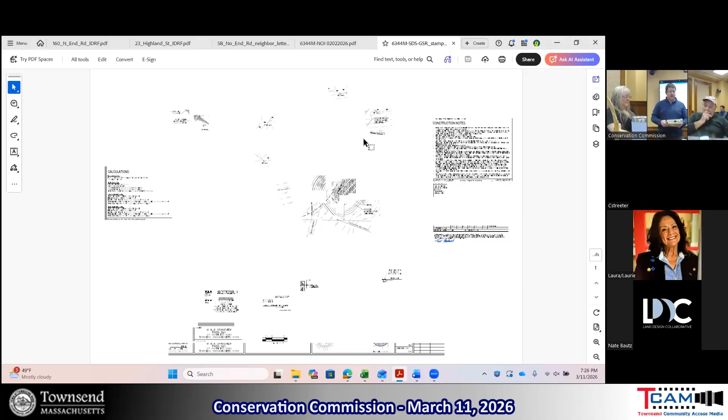In this, the house, the proposed well, and the proposed septic tank, and then associated site grading are all within the 50 to 100 foot buffer. The septic system itself is outside of jurisdictional areas for the commission. That's located completely outside of the 100 foot buffer. Mass DEP had no comments on the project. The project is not subject to a Townsend stormwater permit. We're disturbing less than an acre for a single family house.

And then we're not subject to Mass DEP stormwater standards as a single family house. I do know the project has been before the Board of Health, and I believe we have that permit in hand. Stepping back big picture on the way that this was laid out, we meet all required setbacks from any abutting wells, any proposed wells for the septic system. It meets all required setbacks for property lines. So by default, by meeting those setbacks, we've met the state requirements for impacts to abutting lots with the septic system.

The proposed house itself is located kind of on the northeasterly of the septic system, closer to the wetlands, yes, but most of the grading around the house will be directing runoff back that way. Behind the house? Back to behind the house, yes. So you can see, please. No, I'll share. So there is kind of a topographical ridge running parallel to North End Road, all along the frontage. Oh no, wait, I'm looking at it backwards. That is a bit of a swale, yes. But by the siting of the septic system and the way that's pitched, that will be pitching water more northerly away from North End Road.

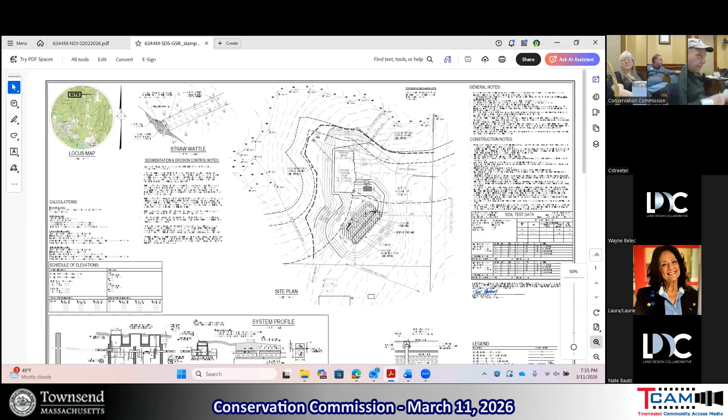Well, it's really for the Board of Health. That's why I just looked at you and said, go with it. Your role is to assess whether or not any Wetland Protection Act regulations are not being followed. The Board of Health has the responsibility to determine if it's gonna affect the neighbor's well water or water source.

What about the intermittent stream? The intermittent stream, we're away from that. Yeah, so I checked it on StreamStats, which is available to anyone who wants to look it up. But it doesn't meet the requirements to consider it a perennial stream because it has less than a square mile of area of watershed.

So that's one. If it has a square mile of watershed area, it has to be considered a perennial stream, even if it dries up. If it doesn't, there's another threshold. It can be half a square mile of watershed with a 0.01. I always get this messed up. But as Jimmy just said, we're beyond that, so we understand where we stand. And it doesn't have a half mile either of watershed. I just wanted to double check.

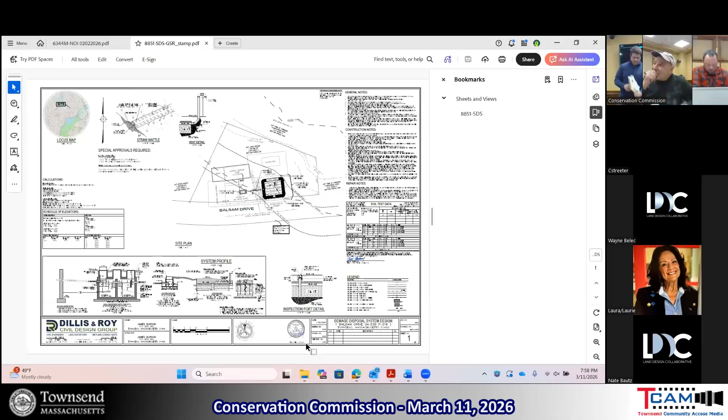1 Balsam Drive, map parcel ID 53B-216-0, NOI, DEP file number 308-0728, TWB 2026-003, approximately 7:45, it's now 7:58. Applicant, James Burson, proposes a project for a septic system replacement. Part of the construction will take place within a riverfront area and 100 feet of a bordering vegetated wetland.

I make a motion to open the hearing at 7:58. Is there a second? I'll second. Mike Watson, yes? James Doreen, yes? James Gates, yes. Pat Noel, yes. Sandra Wood, yes. All right, thank you very much. Oh, you gotta read the legal. Yeah, and then we just gotta make sure our abutters.

Pursuant to the Mass WPA and Townsend Wetlands bylaw, Townsend ConCom will hold a public hearing Wednesday, March 11th, 2026 at approximately 7:45 PM. The hearing will be held via Zoom and in person at town hall on a notice of intent filed with ConCom by James Burson as TWB 2026-003. The property is located at 1 Balsam Drive, map parcel ID 53B-216-0. The proposed project is for the construction of a replacement septic system. Part of the construction will take place within a riverfront area and 100 feet of a bordering vegetated wetland.

Parties wishing to speak in support of or in opposition to this application may do so at the meeting or in writing prior to the meeting. Copies of the application are available for review at town hall during business hours. Colby, do you know if the sheet was, certificate of... Yeah. This is the one that Jack emailed you, Colby. Certificate of. Okay. But yes, I will print it. As soon as you don't need the second.

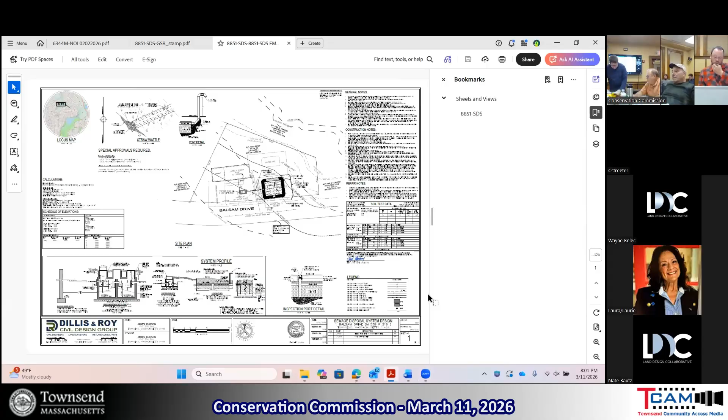But I do see the plan says a 2-compartment, 2,500 gallon tank. Yeah, the only revision on this is stone depth. The original application had said 1,500. Right, but on the site walk, we discussed it was gonna be a split tank, 2,500. Understood. I just wanted to correct it. You said 1,500, we're looking at a split 25. Split 25, correct. And the plans are consistent with that, and the commission does have those same plans. Good. Sorry for the interruption.

Nope, I appreciate it. Yeah, on-site jurisdictional areas include the 35-foot no disturb, 50-foot and 100-foot wetland buffers, and 100-foot and 200-foot riparian zones associated with tributary A of the Witch Brook, which flows, I believe, easterly, which is this direction. To our back, to the right of the property, looking at it from Balsam.

The entirety of the replacement leaching facility, including pipes and the overdig, is located outside of the 50-foot wetland buffer, and is therefore presumed to protect the interests of the Wetland Protection Act, MGL 131 Section 40, which covers the removal, fill, dredging, or altering of land bordering waters. So because this septic system is 50 feet outside of the buffers...

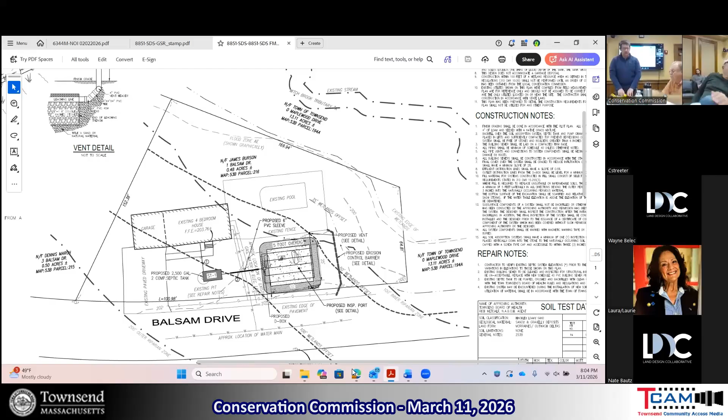Mass DEP did have a comment regarding the Zone AE flood zone. We had shown it graphically, pulled off of the FEMA maps. They stated it should be shown based on elevation. Our project had been plotted on an assumed datum, of 200 feet at the top of the property. It wasn't mapped to any state plane datum.

This was part of the revisions they just did, so they really haven't all gotten to us yet. They're still trickling in. It was a guess, based on their computer modeling. However, they do old modeling, and their mapping does provide an elevation.

When you adjust our assumed datum to the state elevation datum, it's either 88 or 83, I always get them confused. The flood elevation is at 268.4, and our septic repair is at 275, so we're basically 7 feet above floodplain elevation, well outside of it. This blue line here is approximately 268.4.

Is there something wrong with the contours? Because your elevations on the plans aren't 260 anything. No, they're not, they're an assumed datum. So, Colby, if you could turn on the contours. I'm trying. Thank you.

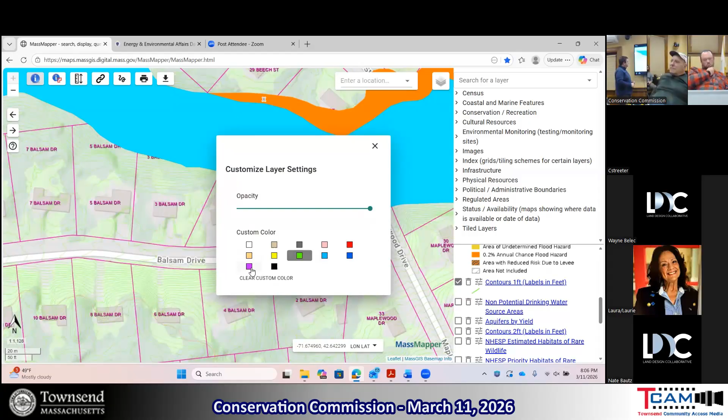Closer and closer. Might be a little better, at least it's visible. So what these show is there's a significant slope, a significant drop down to the floodplain, and we are 7 or 8 feet above it. You could see it from the site walk, and it's very well illustrated there. This area here is where what's called the existing pool is called out on the property.

So I know that comment came up from Mass DEP. It's essentially a non-issue, especially for a septic replacement. We're easily able to demonstrate that we're well outside of the floodplain.

Oh, he's gonna put, so he proposed a wattle at the base of the fence? So we're proposing a wattle here. Right, we don't have it at the fence though. No, we don't have it at the fence.

This septic is not going to be a mound. Groundwater is between 90 inches and 120 inches, and it looks like a fairly granular material. Yeah, it's all sand in there, so they're gonna be able to just put the system in at existing grade. There's gonna be no need to put in a mound that would require extensive erosion controls around it.

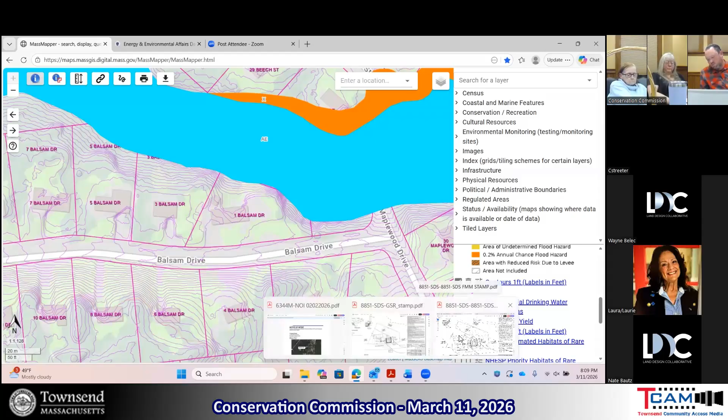And then the legend should be updated to match. So the legend match is the plan. This is an exhibit plan that was with these colors. So this goes no further than this meeting. The actual construction plans, the legend matches those. Okay.

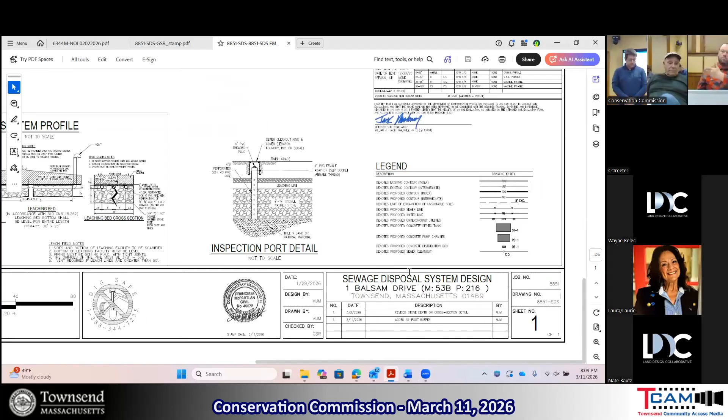So is this the same plan we were looking at the site? Alright, Mike, anything? Well, yeah, Jimmy's right. The snow was clearly melted right there, so something is going on.

But the question I have, going back to the construction materials - if you build a leach field first, can you then put the construction materials where the proposed tank will be and deal with that later? I think the construction materials are gonna be straightforward, pulled right out of there and the new materials brought right in. Everything's gonna be within the disturbed area, from the driveway all the way over to where the leach bed is, Mike.

So that whole area will be disturbed, and that'll probably be their area where they do the removal. The 1,500 gallon tank is gonna leave, correct? The existing tank is gonna leave and they're gonna put in a new tank. It'll be crushed, hauled off. They're gonna put the new one there because it's in the way.

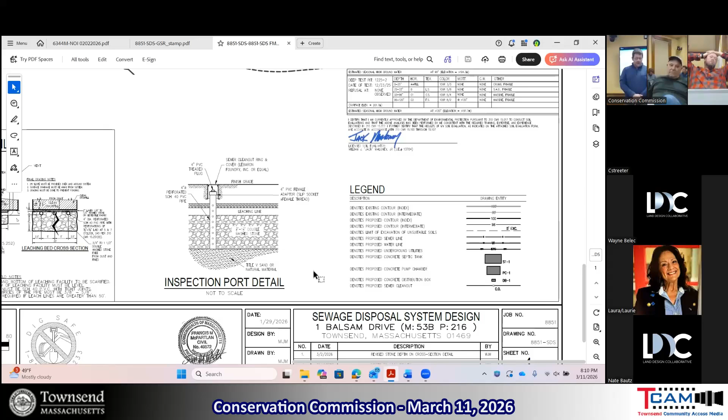And this being a septic repair as opposed to new construction, there's not going to be a massive loam pile where they clear and regrade the entire lot. This is very minimal. Thoughts? No, I think I'm all set on that. Sandra? It seems to be pretty straightforward.

I remember there was another case where we thought it went before the Board of Health and we thought it was approved. I was talking to Colby about that earlier, and I'm glad to hear that the Board of Health did. Well, did they? You wouldn't tell me, they don't normally inform us. But they have not had the meeting yet, as far as I know. I'm unsure about this one, whether this one has any kind of approval or not, because there was something else that went on recently that we voted on.

That was the thing I wanted to ask you about. We voted on it and then come to find out the Board of Health hadn't actually - didn't we have to unwind it? But anyways, I would hate to think it'd be a similar situation because I don't wanna vote on something the Board of Health actually hasn't okayed. I mean, isn't that how it usually works? Correct me if I'm wrong. We've not had to do that in the past. Correct. So now you bring up a valid thing - 10 West Elm was, in all my years here, the first time I've seen that. So, I'm gonna make a motion to continue this to our March 25th meeting.

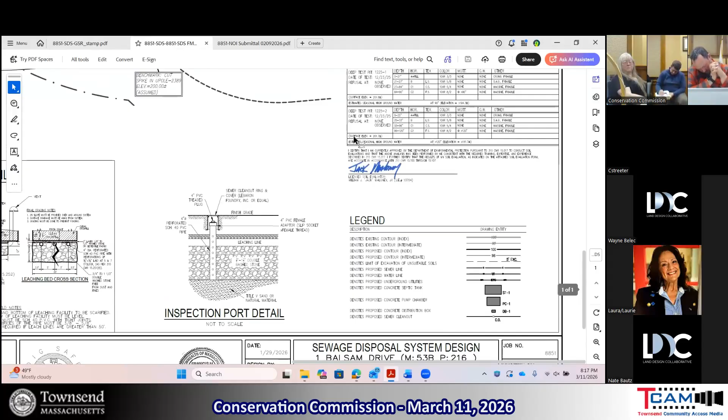We have to close out the hearing. So I make a motion to close out the hearing for One Balsam Drive, DEP file 308-0728, TWB 2026-003. Is there a second?

Go for it, Pat. I'll second it. Mike Potts, yes. James Drowan, yes. James Gates, yes. Sandra Lord, yes. Pat Jamal, yes.

Colby, I want to jump down to item 3.2 - Meeting House Park cutting plan, completion and status discussed. Is it short and sweet? Yes.

So the old Meeting House Park, where we were having a timber cut - Craig Birch and his company finished as of last week. They provided us with all the tally, the trip tickets which present what they brought to the pulp mill and saw logs. There was a lot more rot and funky wood in there than we thought, so the numbers are vastly different than what we thought were going to come out of there. It is what it is. We came out ahead, but at the same time, we all knew we couldn't tell how extensive the stain was into the trees.

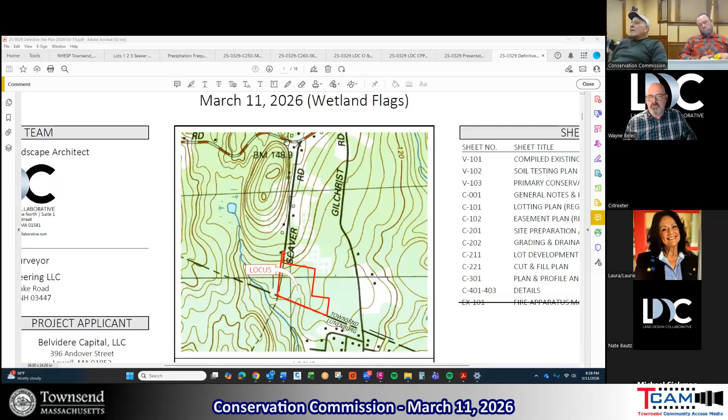For the benefit of the commission, when I met with you folks yesterday, Mr. Chairman, I remember a comment between you and Mike about having some color on the exhibits and the presentation. So I took the liberty of adding a little bit of color to this so that you folks can see in better detail what is going on out here.

So the property, like I said, consists of 13.04 acres. We do have some wetlands on the property. As you can see, it's this area in here in green, and that measures about 51,000 square feet, just north of an acre. So the property, the way it's laid out, Seaver Road is public to this point here. This portion in here is private, and it's actually an easement. This is all the parcel from here, wraps around like this, out around in red, along the town line, back up and over to this narrow section in here.

There is an abutter as you enter the property here, located to the left as you're driving in, and it's located on this site here. So the road is a gravel, partially paved road, in somewhat poor condition. As you get through this area, it's primarily gravel.

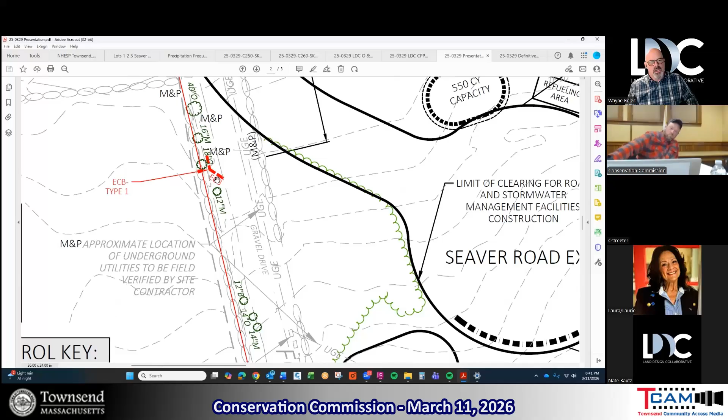Up in here, what we're proposing is another type of erosion sediment control barrier, and that is the silt fence backed by the straw wattle. The reason we're doing that, it's a limit of work, nothing more. There's no grading that's going to flow toward this area, but it serves as a limit of work and ensures that nothing creeps into the jurisdiction of Natural Heritage.

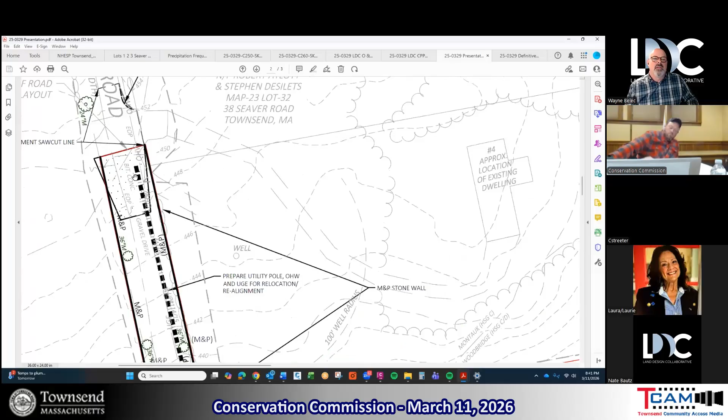Looking at the road from the end of the cul-de-sac, it comes in 500 feet. It's a 40-foot or variable width layout for a couple reasons because of the subdivision rules and regs. It's not a straight 40-foot layout. Not to mention that out here, the width of the road is only about 37 feet. And now I'm referring to the public road layout, the end of the public layout.

So what we're proposing in here is we're looking to maintain and protect the trees along the side of the road, and we call that M&P. Or remove and relocate; if you ever see the terminology R&R on here, it's remove and relocate. As I was saying to the group in the field yesterday, as we look at site prep plans.

Now I could have looked to make this look better with you folks, with DEP, and I could have been disingenuous and said, rather than have the limit of clearing out to where it needs to be, I could have shown it in here, nice and tight to the roadway and wrapping around, continuing nice and tight.

The fact of the matter is in order for us to construct the roadway, we're going to need to remove the material that's in here. So the road will come down through here. It will require the removal of maybe 2 to 3 feet of topsoil and subsoil. It's going to be stockpiled somewhere.

So what we've done is we've run some calculations and determined the piles of these stockpiles. So we have loam stockpile areas and storage stockpile areas. So we've got a combination of things. We've got several hundred yards of material that's going to be stored. We also have a materials processing area.

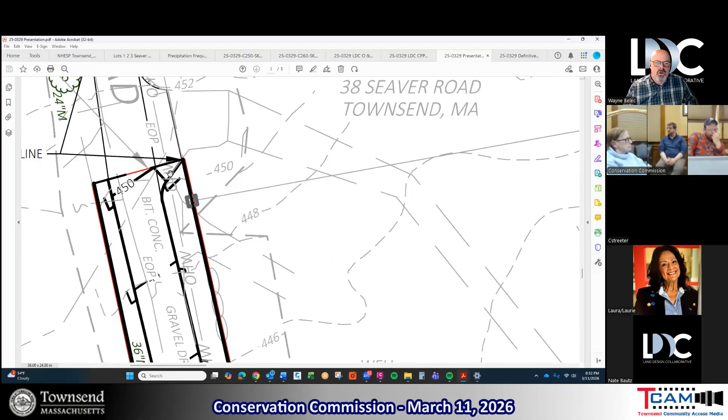So what we are proposing here is a curb system. The curb system is going to be on the sides of an 18-foot wide paved roadway. We'll have 2-foot shoulders beyond that. That work is going to begin up at Mr. Mulligan's, just beyond his driveway, at the edge of his driveway, not on his property, but we're going to install a bituminous concrete berm. Yesterday, when I met with the commission, I thought we were going to have some open drainage. Looking at it again, because of the grades, it's all bituminous concrete berm where we can capture the runoff.

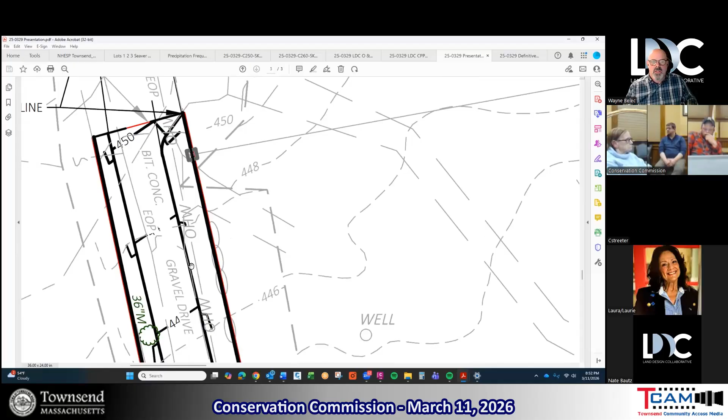Anything that comes down here, as I said, we mimic the topography here. The existing contours pitch in this direction, so we've mimicked that with our proposed contours where everything is going to flow to this side of the road, come down to this area through a sediment forebay in here, and through a very flat grass swale that comes down through here, eventually hits a plunge pool, and the plunge pool has a level spreader on it.

So basically what that does is once the water comes down and it comes through, at this point it's going to be more or less a shallow concentrated flow as it comes into this area in here. Because it's so flat out here, we are probably looking at a shallow concentrated flow. If the topography was steeper in here, it would channelize and the velocities would be significant when it hits the riprap basin. In this case here, it comes down into the basin, hits the level spreader, and then begins again.

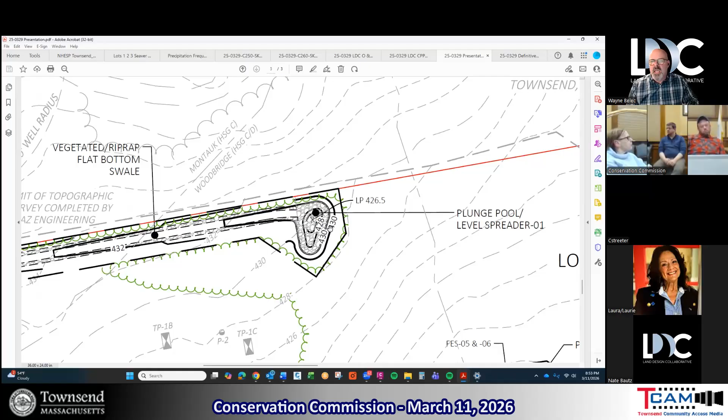Typically when you're looking at overland flow, it begins with a sheet flow, typically 50 feet, goes to a shallow concentrated flow, and then to a channelized flow. Basically what happens here is once it comes through here in a shallow concentrated flow, hits this here, and overtops the top of this berm, it's basically dissipated all the energy, and then it continues the process again.

Now this comes out as sheet flow, again for 50 feet, so that by the time it gets down to this area here, as you can see the contours doing this, topography is going to allow it to come down into a depression where it's going to flow through a pair of 24-inch pipes discharging into yet another energy dissipating plunge pool. Again, same principle, cascading over the top, riprap, and then down below. You will see that, yeah.

You're doing a great job, and this is a very comprehensive plan. I want to focus on areas that are within your jurisdiction. Yeah. So, be polite. Yeah, no, that's fine, Mr. Chairman. I get it. Really comprehensive plan, and I nerdily like looking at it. Well, I appreciate that, and I take that as a compliment. Let's go to your jurisdiction.

So within your jurisdiction, what you see here is the hidden lines, the dash line in here. Those are your erosion sediment control measures, the measures that are necessary to be down gradient of the stockpile areas and for the activity that's being proposed on the site. You're going to have a closed drainage system that's going to flow through some deep sump hooded catch basins to a manhole discharge into a sediment forebay, which is going to overtop and then go into a basin that's going to have two sections in it, linked by an equalizer pipe.

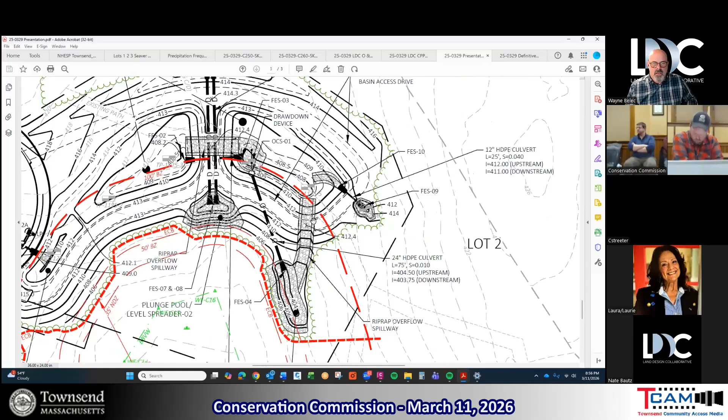We are proposing this at this time, again, just beyond your jurisdiction, but we would rather plumb the basin for everything coming down the road associated with the driveway that's going to be serving this lot up in here. To give you guys an idea.

That nice flat discharge at the bottom of all these basins, looking at how that relief is. Yep. So it mimics what you've done to the top. Down through that middle strip, you'll get a high velocity. Once again, you'll dump into the riprap. Nice level flow, slow it down, discharge down to the next one, okay. Yep, nice. So yeah, that explains it in a nutshell. What we're looking to do is just dissipate all the energy before it gets to the resource areas. The last thing we want to see out here are any erosion issues down the road.

So after everything's graded out, everything will be stabilized, loamed, seeded. When we go to do an as-built of the site, we'll do an interim as-built of the basin to make sure it's properly constructed, so that they're not going out there after they've loamed and seeded and disturbing anything. We like to get that before they loam and seed, tell them it's okay to go ahead and loam and seed, and then we're done. And then after the two growing seasons or within that, we'll be coming requesting a certificate of compliance for the order of conditions.

This will all be subject to the National Pollutant Discharge Elimination System program, the NPDES program, because we're altering more than an acre of land. So we're going to need to file an eNOI with the federal EPA for the disturbance of more than one acre of land, and that's going to trigger a stormwater pollution prevention plan.

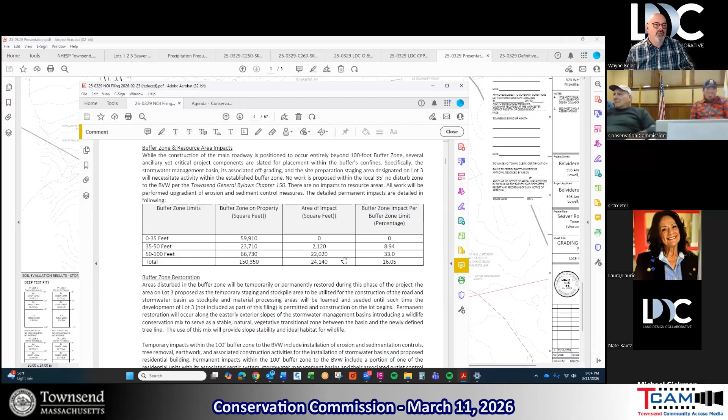The wetland system on site is about 51,000 square feet. So when you look at all the area within your jurisdiction, the wetland and the buffer zone, you're talking about 200,000 square feet, roughly 5 acres. Of that 5 acres, we're altering a total of a half acre, and that's all beyond, mostly beyond 50 feet of the buffer zone, in that second section of the buffer zone up in here.

Any questions, Mr. Chairman?

We can go around the table, and I want to remind everyone this is not for the house lots. This is just for the road. It's for the road and the stormwater associated with the road -- stormwater management, water control, etc.

They designed it so that they wouldn't have to redo stuff when the time comes to do house lots, or if they did, it would be taken care of now. But you said 2 out of the 3 lots you foresee filing. Yeah, I think so, Mr. Chairman. So lot 1 is not going to be within your jurisdiction. This guy here will be -- the septic system and the grading will be within your jurisdiction.

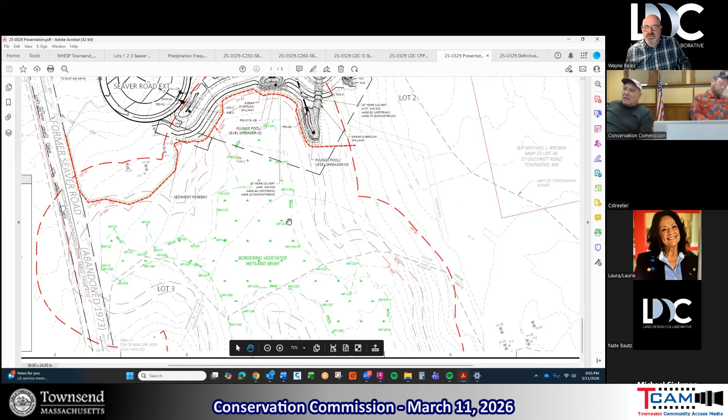This guy up in here, I don't think so. I think his driveway comes up through here, so I don't foresee any of his work being within jurisdiction. So you're probably looking at just this lot, and that was on that long dog leg that went down. That's correct. Okay.

But regardless, yes, this is just -- Colby, I can see that. Hi, Wayne. Hi, Colby. I got a question. I'm gonna come close to the microphone so I don't have to yell.

Do you intend on completing this order of conditions process before you sell the other parcels, so that the certificate of compliance doesn't become the responsibility of the new homeowners? He did say that, yeah. No, he did say that. Obviously they aren't going to apply for the completed order of conditions for 2 growing seasons, but it is gonna take time to sell and build. So through the chair, it's rare that we would request the order prior to the 2 growing seasons.

The only exception is if you go ahead, loam and seed, and as part of that loam and seed you get some decent rains and things really take off, and you exceed that 75% coverage, then you're able to go for it. I've had situations, for instance in Hudson, within 6 months everything was lush, well beyond the 75%. So typically it's 2 growing seasons, but on occasion you do get them to go quicker. But yeah, we're anticipating 2 growing seasons.

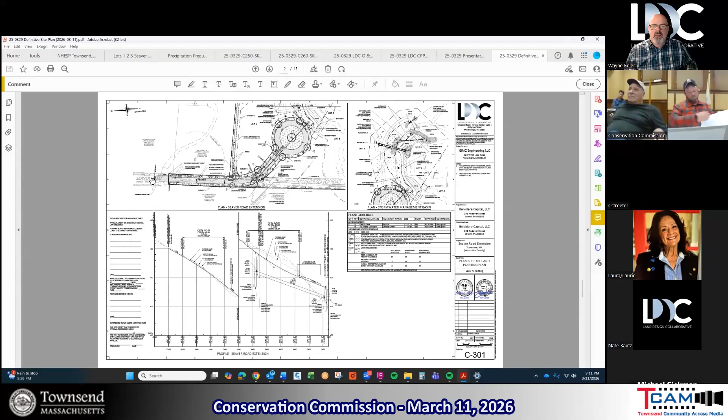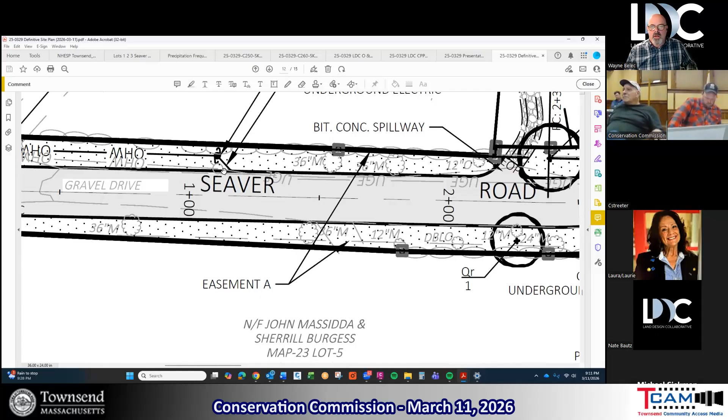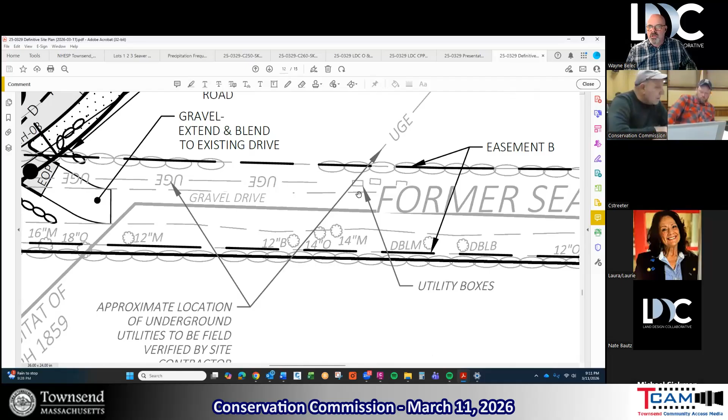I'm going to go to the plan and profile sheet to show you how the utilities are coming into the site. So here we've got a utility pole—there's an overhead wire that comes down to a utility pole located right here. Because that's within the curb, we're going to relocate the utility pole, rerun the overhead wire, and then go underground to connect to the underground service that currently exists and serves the property here and here. There are utility boxes here serving it, and it shows an underground electric that comes into the site.

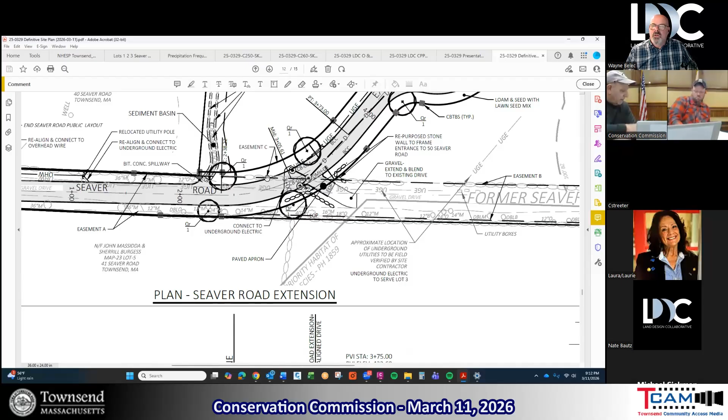So we're thinking once we get out there, we'll do a little exploration to confirm that this does in fact serve Lot 3. The rest of it goes on to 50 Seaver Road. What we're looking to do is pick up from this underground electric right off the edge of pavement, and run it down to a transformer pad here, which will serve the 2 lots out back, going up a driveway. So there'll be a driveway out to Lot 2, the one that dog-legs, and it'll have its own service there—this guy can pull off of this one right up into his lot.

We are proposing— go ahead, Colby. We did have a couple comments from DEP, and they're all related to stormwater standards, which will be addressed by the stormwater permit.

Okay, thank you, so interesting—I do appreciate that. As I said to the folks yesterday, for this particular project, DEP really doesn't have a say over stormwater. Although I appreciate them weighing in, they really have no jurisdiction here because it's a small subdivision, only 3 lots. So when we filed, I deliberately did not file the stormwater permit information with DEP, because it's not within their jurisdiction—it's within the jurisdiction of the town of Townsend because of your stormwater bylaw. Had you not had a stormwater bylaw and regulations, there would not have been a stormwater permit filed, and the amount of stormwater mitigation proposed would have been significantly less.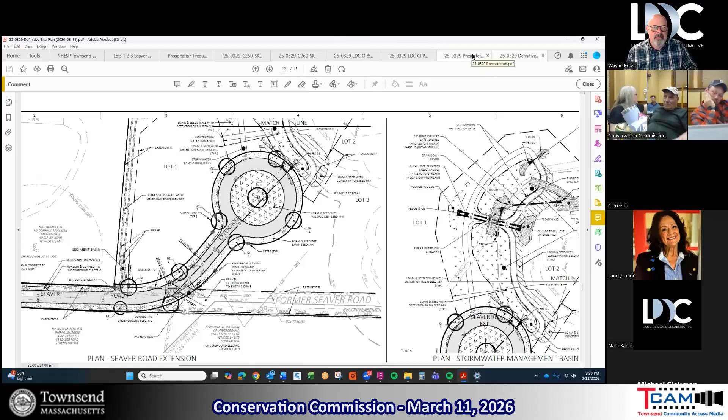Sandra, I'm sorry, I don't mean to make this go longer. Don't be sorry. Well, I just want to go back to, I know you started this, about the, is it priority habitat that goes along the former Seaver Road? Yep. Could you just walk it back over to that and tell me what kind of protections we got there for that? Well, Wayne did say he didn't know exactly what was being protected. Right, I remember that, yes. Yeah.

So I'm just kind of concerned about that. Yep. So I do appreciate the question. So what we're doing is, because this is coming down to this location here, this is, as you folks saw yesterday, this is gravel, continues to come down to this area in here. So basically what's going to happen is the stormwater is going to flow down into here, into the catch basins, get collected. Anything from here is going to continue downward.

Now, as we come off the paved portion, the new paved portion of the roadway, we're going to have to marry to the existing gravel portion. So what we're going to do is we're going to slightly come up in elevation, maybe 1 to 2%, very shallow, to a point up in here, and then go from, excuse me, are you okay?

Come on. Let's get that boy. There he is. There he is. He's got boxer mitt paws. So I bring him to the vet, and the vet said that they've never seen a cat with such big paws. They're monstrous. And he's got the thumbs. So he's got the thumbs. It's great. They're about gym-sized hands.

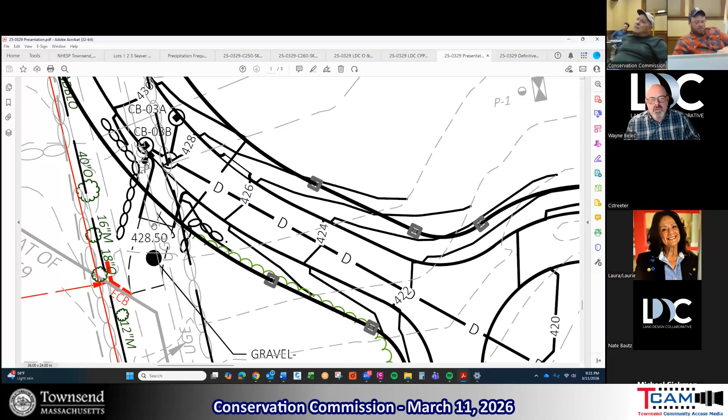So what we're proposing is that the pavement ends here for the driveway, and that's the high point. So any water that's here pitches back into here. This right here will continue to come down to this area where we transition into gravel right in here. Right, this location here, this red, is the edge of what we're saying is a limit of work. We're not going beyond that because that's the jurisdiction of the Natural Heritage Endangered Species Program.

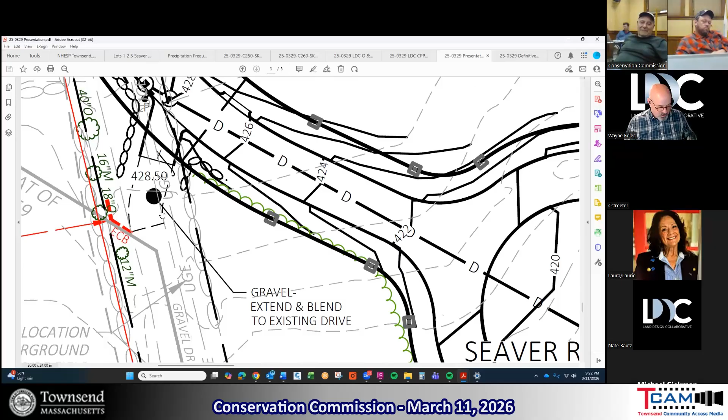Our dealings with them, and I don't know if you folks have dealt with them. I love dealing with them. Some commissions like it. Developers hate it. Engineers hate it. What's that? When you say natural heritage or endangered species? No, natural heritage. They used to be decent to deal with, and now. Right. We do pay attention when the word natural heritage comes out, yeah, only because you've got to respect the size of the club.

Yeah. Well, I guess the answer to Sandra's question is, they're not gonna be doing anything within the estimated habitat or priority habitat. So the left of that line is protected? Correct. I wish I knew what was being protected, because I'd feel a little better, you know? Well, it's probably something we're not allowed to talk about. In time, what you'll learn is that any time natural heritage says, well, we're not gonna tell you, they know, and we know. Yeah, I could actually find that out.

We know. If they don't want it to be broadcasted or verbally stated, they know, and we already know. Do you know? No, because it could be something else. Should it be a plant or the animal or both? It could be either one. We don't know. So the proposed project is not gonna touch it. That's correct. So the heavy equipment won't be close to that area? No. The only time they're gonna be there is blending the existing driveway into the new road. But they're not to be in that area.

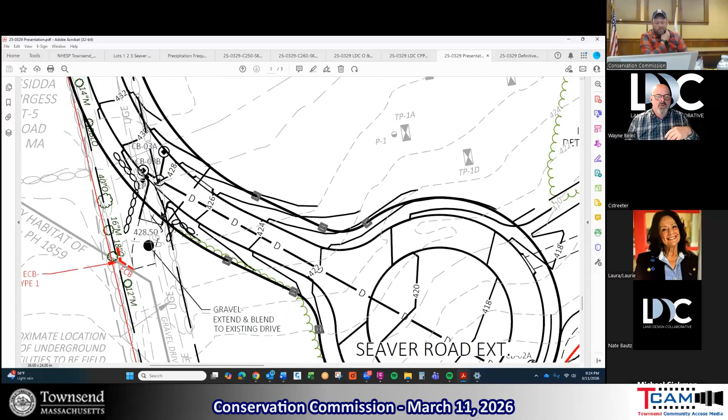What we're doing for him here is we're going to be removing a section of stone wall that exists out here. So stone wall comes through here. We're going to be taking some of that out and we're going to wrap it around and create a nice entrance for him in here. Repurpose that stone wall so it gives him a nice entrance when he gets home. Like I said, at number 4 and Mr. Mulligan's, sensitive there as well. We can discuss that further when we're before the planning board.

But again, looking at these abutters, part of our approach is they've been here, and whenever I do one of these projects, I look at this as if I were living there. Okay, and you gotta be sensitive to that. I mean, everybody's gonna have to live in the same area together. So you want to work to make sure that you don't overturn what they've been accustomed to. I could have gone with more lots in here, but no, it wasn't the right thing to do. We've got 3 lots and we're fine with it.

Well, I thank you for being very sensitive to the natural needs of the area. Thank you. Did you have anything, questions, Will? Do I have any more questions? No. Well, I guess one last one is, there's a little buffer, is that 12 feet or something? Is that the number on there? Or did I read that wrong? I can't read it very well. How many feet of protected area do they have to have? I'm just curious. A buffer for what? A buffer for the natural heritage area?

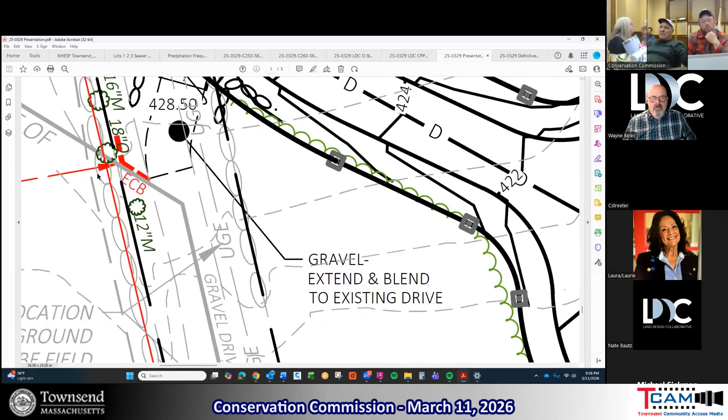Oh, that's way up in the far corner. Or are you talking about the road with the gravel? Right there. Okay, so it's 12. Right around there. I can't read the numbers, some kind of numbers down there. Well, the bottom line is it's far enough. Oh, that's a 12-inch, that's the size of a tree. Oh, yeah, okay. That's a 12-inch maple. Oh, I'm sorry. There's a maple there. I couldn't see the endangered maple. Come on.

But yes, thank you very much for being very sensitive and not putting a big giant subdivision. You're welcome. You know, it's such a beautiful area. If they were in a critical area, if they were in anything that natural heritage would be concerned with, they'd be all over it. So usually what I do in those cases, we're proactive. And that's what I do well with them. Whenever you have a situation like this, you get a finding from them, get a determination as to whether or not it's going to be an issue.

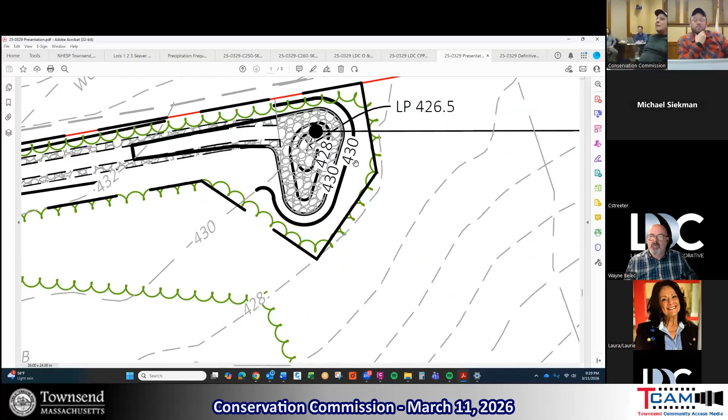This guy here? Yeah. So the overflow that comes down from the curbs that you're putting in. Okay, I'm sorry. No. Where you are is right. But when the water comes down there at the end, at the 430 foot topographic level, when this fills up or if it clogs up, that level just continues down into 40 Seaver Road there. Is there anything to prevent the water from going there, which is at the same level?

So if you go northeast on your plan, northeast, that's all the same level there. So are you, okay, I see what you're saying. So what's going to happen, and I do appreciate the question. So through the chair, the question is, if I understand you, Michael, you're saying it overtops at 430, and because we have the 430 contour coming up through here, your concern is that, because it's the same elevation, it's going to impact number 40. Yeah, and relatedly, does it really need to be along the property line? Yep. Good questions, and I appreciate it.

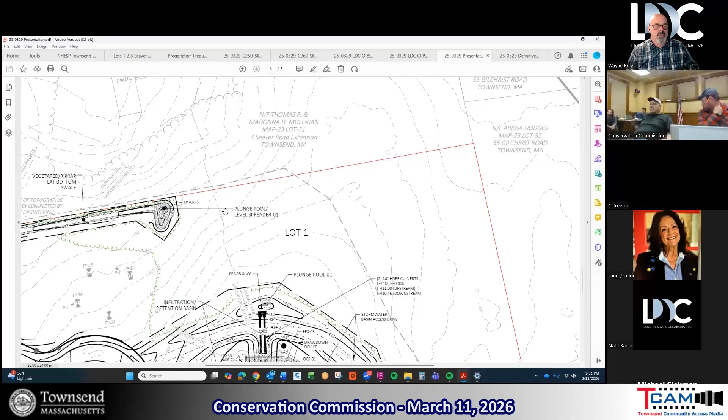So, your comment before, and there's the issue of the town having given the road back and then approved houses on this road. We'd be happy to interact directly. I understand you need to have a whole bunch more hearings going forward. Absolutely. So if I could, through the chair, if Colby could give Mr. Siekman my contact information. Certainly. We can further communicate and I can further answer questions because, like you said, we're going to go before the planning board. So, Mr. Siekman, if you could email Colby, his email address is on the town page.

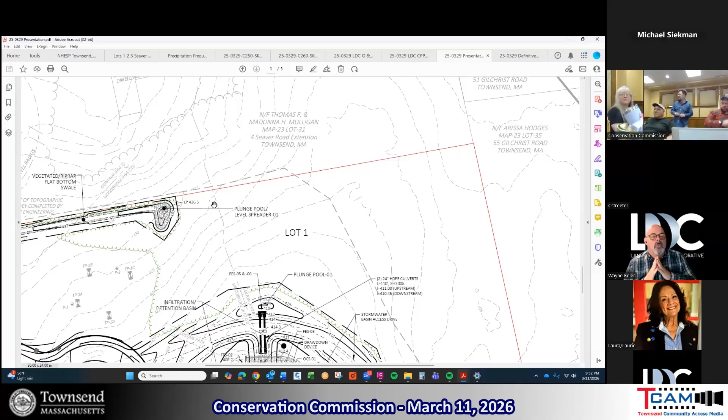For conservation. You can just give, I don't know offhand. I know, yeah, but I don't know offhand. But if you could email him then Colby will email, no, please, hey, oh, I'm sorry. It screws up the owl. May I give it to him? Yeah, sure, go ahead. Okay, it's CStreeter@townsendma.gov. How copy? Oh, sorry, that's too military. Yeah, you get that? Yes, thank you very much.

Mr. Chairman, I would like to, if it's okay, address Mr. Siekman's question. No, no, and again, my apologies for not asking if there was any public comment. Well, I think it's because I've been long-winded and I just gab too much. So that's all on me, Mr. Chairman. So basically, to address the question. So you're right. I do appreciate, Michael, your ability to read the contours. Not everybody can do that. Some of my own staff can't do it.

So looking at this, this is a 428 contour. So this in here is 2 feet lower than the 430. Okay, so when it comes in here and overtops and it hits the 430, which is the same contour as this guy in here, as Michael had pointed out. But what happens is once it hits the 430 and it overtops the 430, we have a 428 in here. So it quickly drops down 2 feet, and that's a slope at about a 3-to-1. So 3 feet horizontally to 1 foot vertically. So essentially, if you can see my arm, it's doing this.

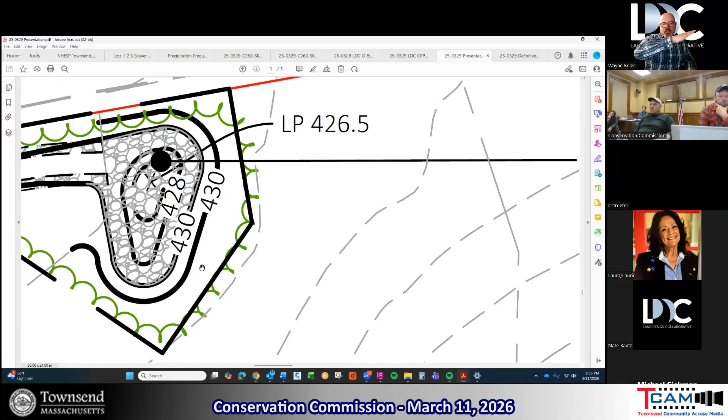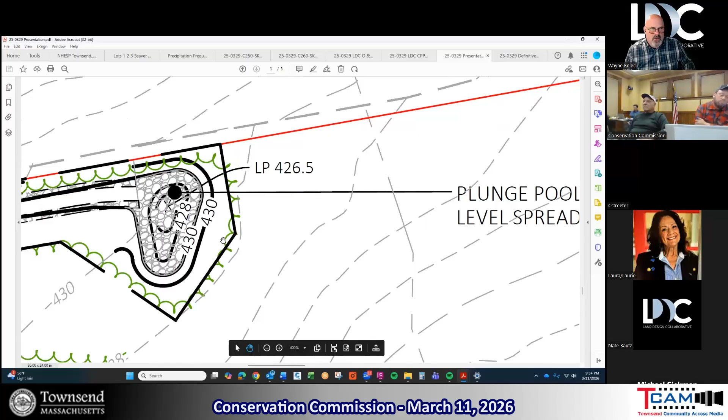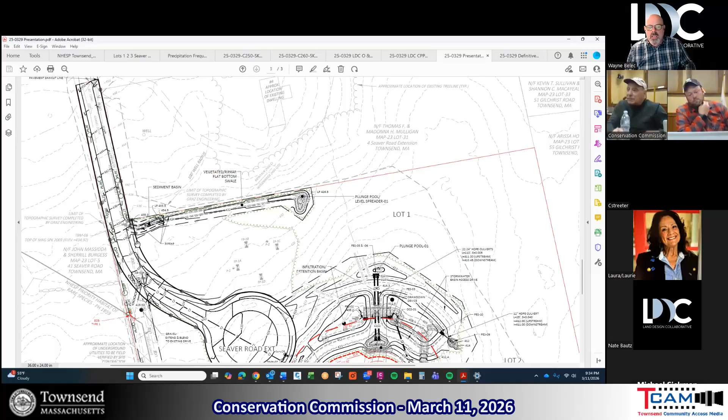So to your question as to why we captured it up at the beginning, whenever we do a project like this, we like to what we call shunt the off-site water away from areas that have to be mitigated. So if I were to take all of this runoff here and bring it into the system to discharge where it eventually goes anyway, which is the reason we have these pipes in here, if I were to send it in this direction, I would have had to maybe double the size of this stormwater basin. That would have been more work within the Conservation Commission. So that basin would come around like this. And it isn't necessary; if you've got water that comes down to this point anyway, and you're not changing the hydrology on it, there's no reason to mitigate for it.

So basically what we did is we took the runoff that's coming down through here, captured it, slowed down the velocity in this very shallow channel, and then let it go into the plunge pool to overtop. So it goes down where it wants to go. It's where it currently goes. So it comes down to here, in through here, catches this area into the wetland system.

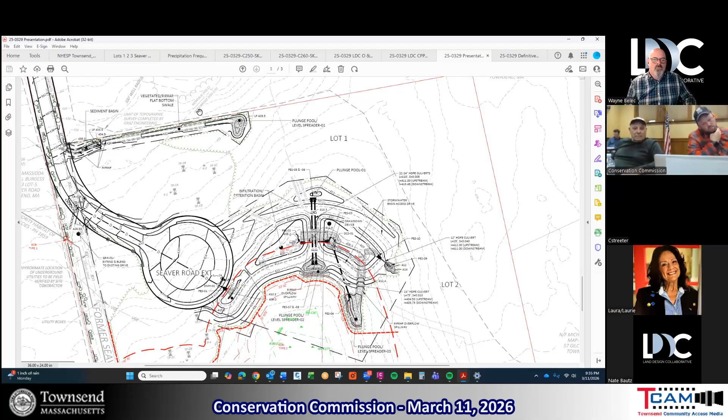From this one, it comes down here, catches this gutter, comes down through here, picks up this, and lo and behold, it comes down into the wetland system. So it does the same thing, but what it does is it diverts the water rather than running it through the site. We shunt it around the site so that we don't have to mitigate for it and double and triple size the basin that's down below.

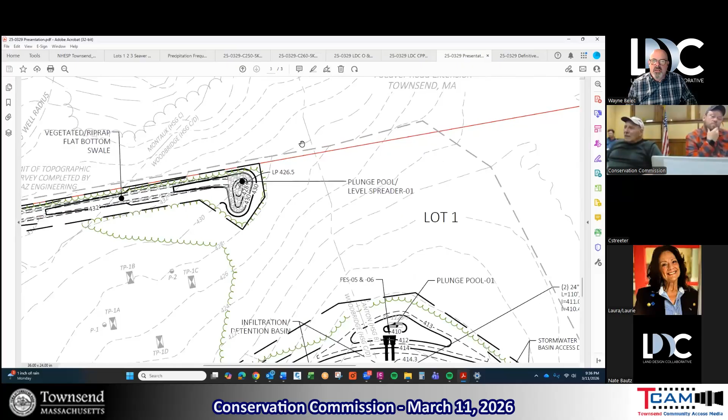And like I said, Michael, in terms of the impacts to the upgradient property, your 430 contour is right here. It's being picked up right here, and now you have the 428 that's here. It's going to hit that 428 much more quickly than it's going to want to head off in this direction. I hope I explained that clearly.

Yeah, I think it might be more productive if we talk in person. Sure, absolutely. I do appreciate the discussion, the possibility of talking. Absolutely. Through the chair, Michael, give me a call. Okay. Do you have any other questions, Michael? Not for now on the stormwater, but thank you. Okay. Thank you.

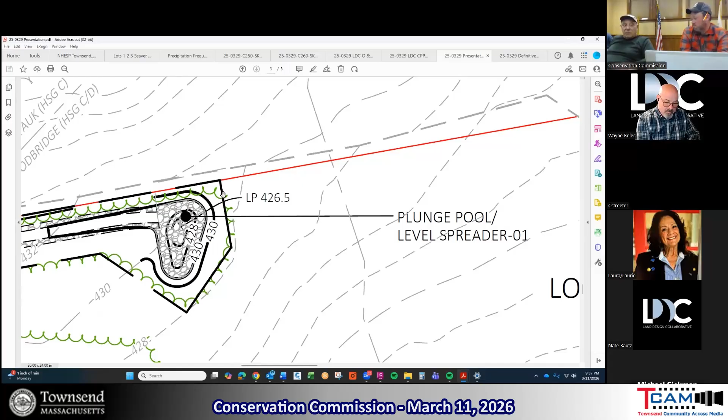This is a slippery slope, because we're not stormwater. And it was a legit question, and I just was concerned if somebody had just recently passed away, if that would change what is going on here. Colby, what are your thoughts on this? I'm comfortable with this based on the plans and the site, our two commissioners that made the site walk.

Okay, yep, the NOI application is very thorough and complete. It's a very well thought out process for the stormwater, to proceed through this development, which will be covered by the planning board even more thoroughly. The stormwater permit has a lot of components to it and requirements for documentation, so they are gonna be very robust in their application. On the conservation side of things, it's minimal impact.

Very minimal, yeah, I think he's done a very good job to keep any detriment to the wetland at a minimum, and stay in the spirit of the WPA. And along with that, he was gonna remove all that sediment out of those two locations. We don't see a lot of contractors do stuff like that.

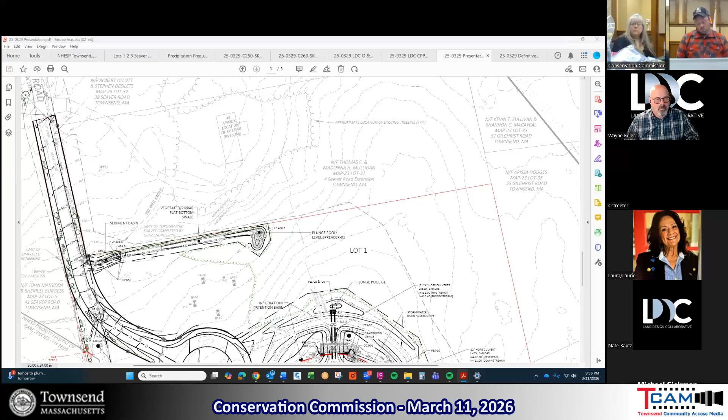I'm gonna make a motion that we issue an order of conditions for Zero Seaver Road, DEP file 308-0729, TWB 2026-004. Make sure no one else wants to talk. Is there a second? I'll second. Any discussion? Roll call vote starting with said, yes. James DeRoyan, yes. James Gates, yes. Pat General, yes. Sandra Lord, yes.

Wayne, this plan is thorough, it's comprehensive, it's complex, as Mike said, but it's very well thought out, and I think it's the best solution for this parcel. And we thank you for your time and effort you put into this. Oh, I thank you, Mr. Chairman. I actually hope to work in town some more at some point. This will be more of what you see.

And as I said to the folks in the field yesterday, I still sit on a board in my town for 26 years, and prior to that, 7 years with the ConCom. When you're sitting on your side of the table, on the permitting side, you get a better appreciation of being volunteers in what's a thankless job. It is a job, and it's thankless. People don't appreciate what you do.

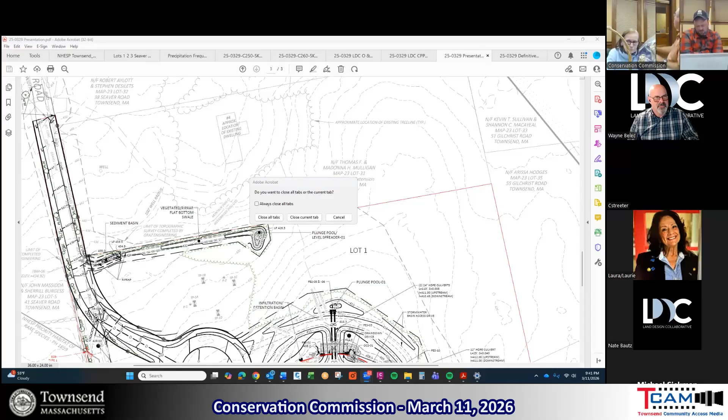You're the vice chair anyways. No, I don't want to be vice chair. 2.4, 41 Brookline Street—that's right, there's more. I worked for Wayne before. I'm gonna get a copy of those plans, I want to see what he did with the drainage.

2026-005, approximately 8:30 PM. Applicant Jamie Baker proposes a project of replacing a septic system within the riverfront area.

So I'm gonna read the legal ad: pursuant to the Mass WPA and Townsend Wetland bylaws, Townsend Concom will hold a hearing on March 11th, 2026 at approximately 8:30 PM. The hearing will be held virtually via Zoom and in person at Town Hall on an RDA filed with Concom by Jamie Baker as TWB 2026-005. The property is located at 41 Brookline Street, map parcel ID 52-57-0. The proposed project is for the replacement of a septic system within a riverfront area. Parties wishing to speak in support of or in opposition to this application may do so at the meeting or in writing prior to the meeting. Copies of this application are available for review at Town Hall during business hours.

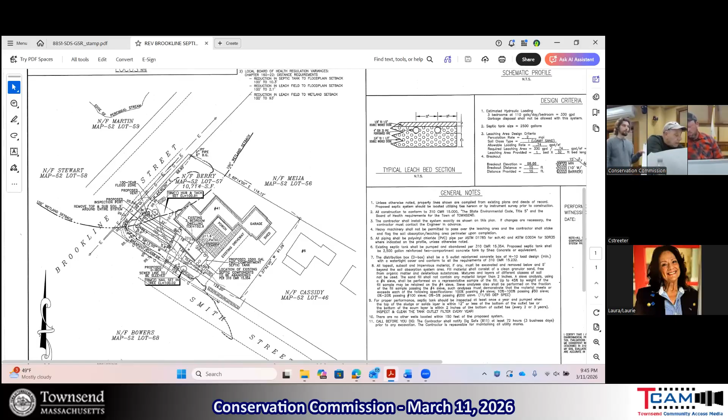So basically we are getting a little bit closer to that wetland, and the reason is to get away from the water line that's right here. I believe right now there are components of the system actually over that water line, so we're working to meet Board of Health setbacks from that water line. It's just a very tight site, and this is the best location for that septic system.

There is some mapped zone AE on this site that runs right along the edge, and actually about 10 years ago we did a flood study on this site to create a LOMA map for the structure. That's a survey flood line from a field survey. This system is all sand and gravel from the test pit, so it's in the ground—we're not having any effect on that floodplain.

He has the little bridge that brings him onto his property. No, there's a driveway off Smith Street right here, so it's right on the corner of Smith and Brookline Street. I don't believe there's a bridge.

What were the Board of Health comments? I'm actually not sure exactly what the Board of Health comments were.

One of the comments was that we had this designed as a 4-bedroom house because that's what the tax card said. Then it came to our attention that the previous approval was for a 3-bedroom house, so we had to go back and limit our design to a 3-bedroom house. So we changed it over from a geomat system to a pipe and stone system, because we could use pipe and stone, so it didn't need to be as big.

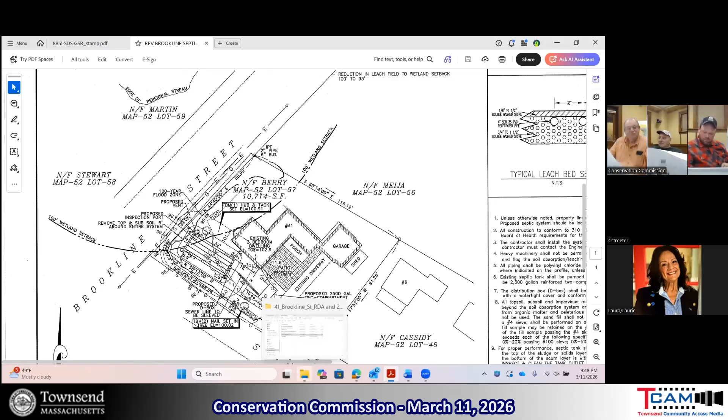Tiny. You gonna share pictures while you're coming up with questions, on the tiny house, tiny lot?

Is there any erosion control proposed? We're not proposing any just because everything's flowing into that catch basin, which does provide some sediment control. So is there a silt sack proposed?

We could do a silt sack, I guess. We would probably need to touch base with DPW because that's in the town right-of-way. If we were to do a curtain within that catch basin, or we could do a silt sack around, right on our property, right on that corner.

I think you should probably include that. Yeah, as soon as you see the little piece, all of a sudden you know just what you're looking at. Oh, that house, oh right?

Sorry, so new terminology, silt sack? A silt sack is what you put into a catch basin, and it's held up by pieces of rebar, and it catches any sediment that may flow into it.

That makes sense. And then it gets so gone off, you usually poke a hole in it. Like a coffee filter. Yes. That's real technical terminology. Well, I'm used to that. Well, it's the best way to describe it. Well, it's nice to have a good analogy.